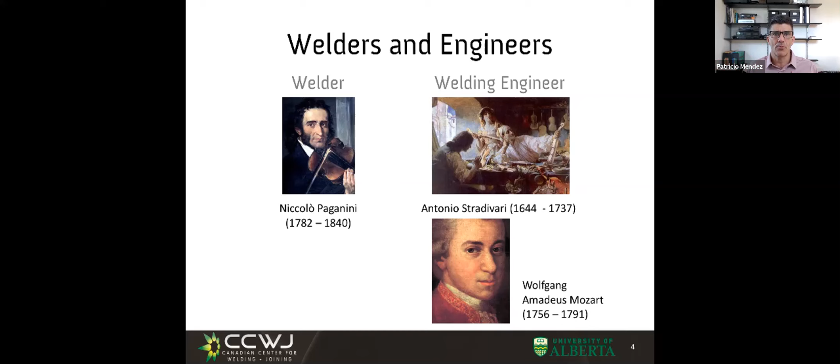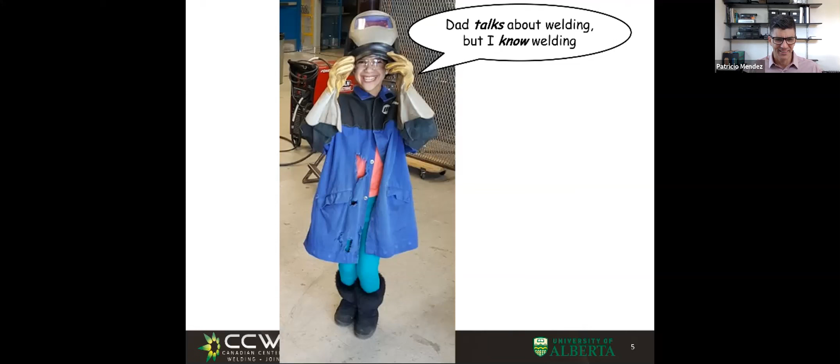Now, I say all this to some extent as an excuse for my poor welding. This little girl you see here smiling, that's my daughter. Two years ago, she had a day of welding training at St. Joe's, and she loved it. I haven't had that training, so she laughs at me because she says I talk about welding, but she actually knows welding. And yeah, it's true. But when it comes to explaining the bad welds, yes, I can explain those. And other things. So let's move on.

Welding is like an unsung hero. People don't realize welding until things happen. Let's talk about when bad things happen.

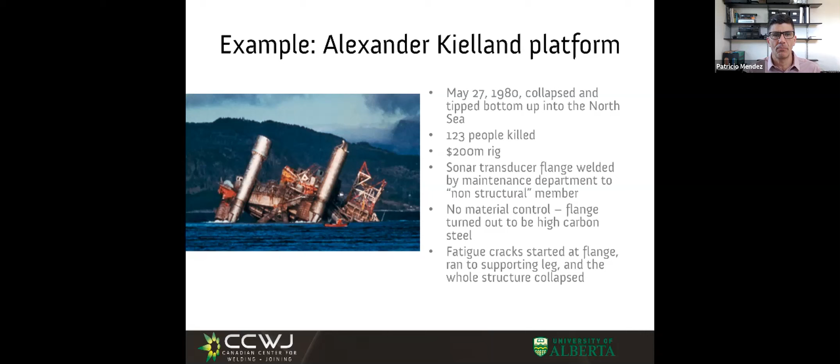Here you have an offshore platform that collapsed and killed 123 people, $200 million in damage. What happened for this platform to collapse? Well, these things measure depth using a sonar, and they wanted to put this sonar underwater, so they said, okay, let's weld it to a non-structural member. Here you have the legs of the platform, these five legs, and you see this crossbar. This was in theory non-structural, and they put this sonar, this hydrophone, here.

Now there is a problem. As you're going to see and learn in exquisite detail, not everything is welded the same way or with the same materials. In this case, when they welded steel that looked just as shiny as any other steel, the steel became too hard and too brittle, and eventually it cracked. Just for putting a hydrophone. So this non-load bearing member, when it cracked, this leg essentially became a pivot point, and the leg opened up, and the whole platform tilted and collapsed. Just because they put a stupid hydrophone in a non-load-bearing member.

Welding matters. If you don't know welding, bad things can happen. And the person who put this here, maybe they thought they knew welding because they could lay down the bead. But in the end, something went very, very wrong.

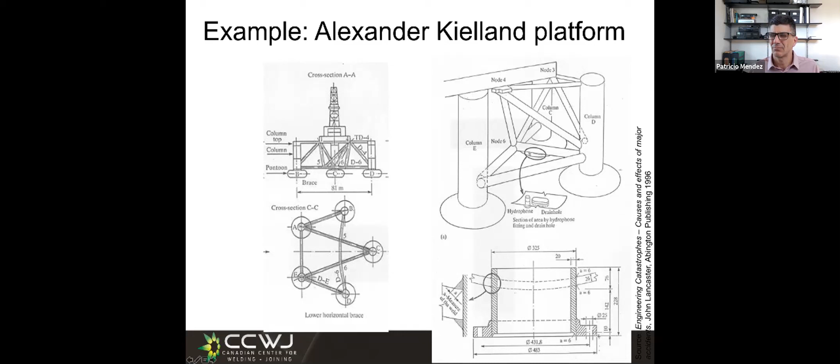But welding wasn't really well understood, and many aspects of metallurgy were not well understood. And what you don't know can actually hurt you, pretty bad. These ships were cracking, not because of the weld itself, but the cracks were associated with the welds and pretty poor steel. So if you don't know welding, you can die on an offshore platform, you can die in a ship sinking. I read that more of these ships sunk because of structural failure than because of torpedoes. That's a pretty sad thing to say, right?

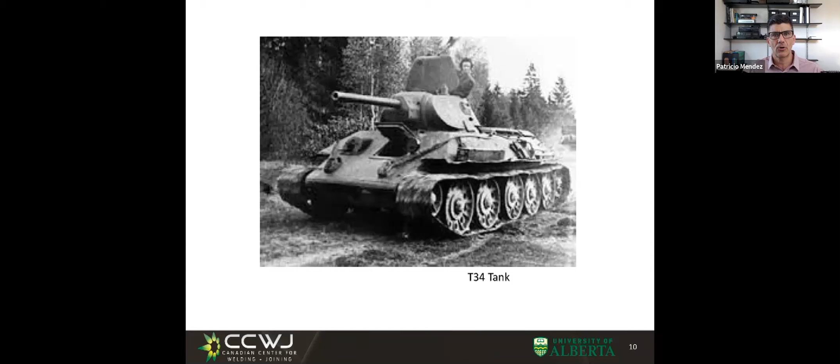The Airbus 380, which has two floors, could only be made so big because it's welded instead of riveted. And because it's welded instead of riveted, it can be a lot lighter. Funny enough, the people who developed this laser welding for the Airbus 380 were former Soviet engineers from the Paton Welding Institute - the one that developed the welding for the T-34 tank. But after the Berlin Wall fell, many of the top scientists were unemployed or very underemployed, and they went to France and did this amazing thing.

Isn't that crazy? Now, when the F-22 and the F-35 were developed, they started to weld airplanes. Typically, planes were riveted. When you weld fighter planes, you use electron beam welding, because typically you make them out of titanium, and titanium is very sensitive to oxygen, so you weld them in vacuum.

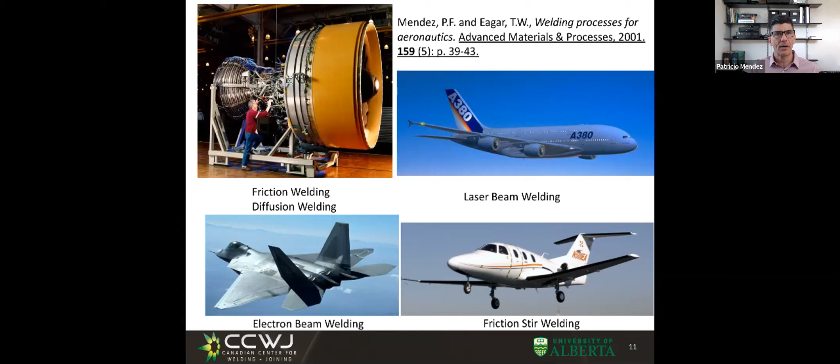Welding enables technologies that are so complex and so radical and so influential. Rockets, you like rockets? I like rockets. And so let me tell you some stories about rockets.

The Saturn V, the rocket that was developed to put people on the moon by the end of the decade of the 60s, almost failed. There were two problems that took them until the last minute to fix. One of those two problems was that they couldn't weld the second stage. Isn't that amazing? We all almost missed the race to the moon because of welding.

There are articles, and I have uploaded in a supplemental material in the lecture of today, some papers of the time, and a paper that I wrote describing some of these stories.

External tank of the space shuttle, very interesting. It's aluminum and used to be welded, until somebody thought, hey, if I mix aluminum with lithium, lithium is number 3 in the periodic table, it's so light, right? If I mix aluminum with lithium, my aluminum is lighter. And all the weight I save in this tank, I can use it as payload. How smart? Except you cannot weld it then.

The first attempt, the first way of welding it, was using a plasma process developed in Canada. And then they switched to a solid state process, friction stir welding, which I mentioned about the commercial jet plane, the small jet plane.

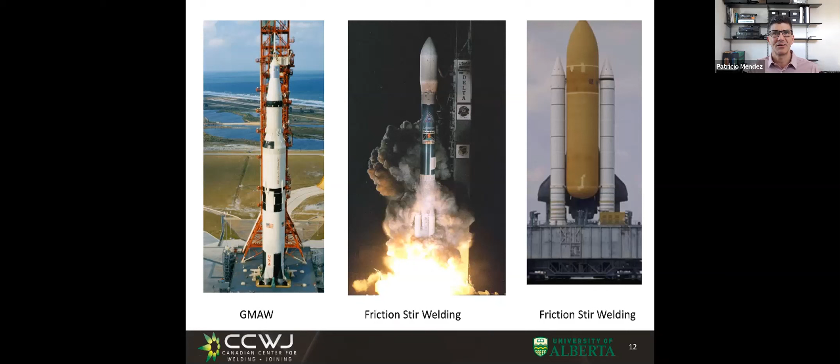Welding matters. Cars. One of the key obstacles in making cars efficiently is welding them. Now that I mentioned Elon Musk, you know that the Model S and the Model X of Tesla are made of aluminum, and they're essentially made by hand. But the Model 3 is made out of steel, and is meant to be done in the same way you make a Volkswagen car. Super automatic, super high production.

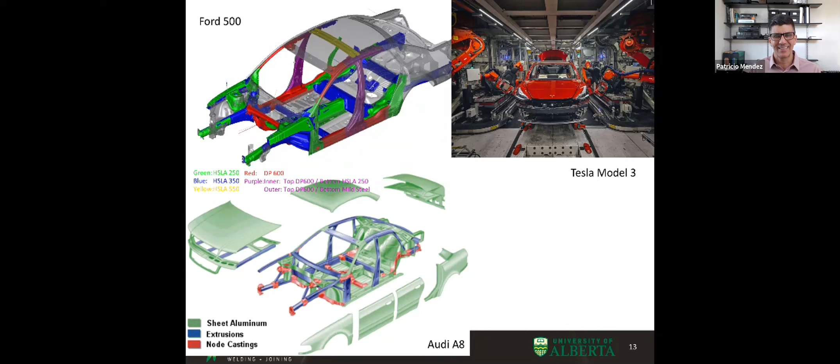Okay, people have been making steel cars since forever, but Tesla wasn't. When they started to make the Model 3, it wasn't welding well. It was a terrible nightmare. And one reason why the Model 3 was delayed with lots of problems for Tesla is because they had welding problems. Isn't that interesting? Welding again. Everybody knows Tesla and everybody knows Elon Musk and everybody knows that the Model 3 was late. What not everybody knows is that just welding, spot welding, was a problem.

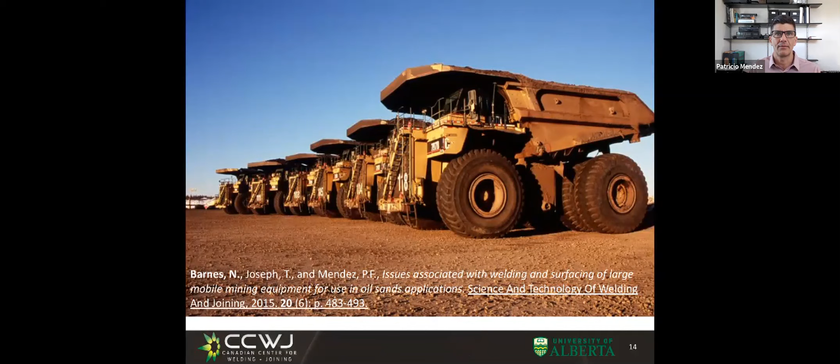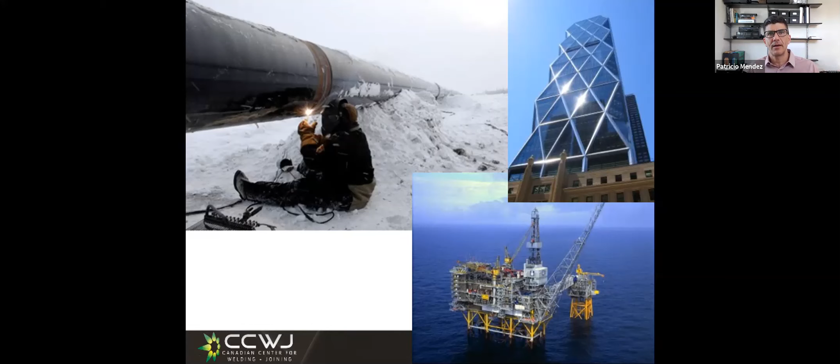If you remember when I told you I was in charge of a foundry in Colorado, we would go for field trips with the students to an art foundry. And in this art foundry, what they were making is a horse. And what I learned is that a cast sculpture in reality is a welded sculpture. Who knew? So when people make a horse, the artist makes a horse and they make the patterns and then they cut them.

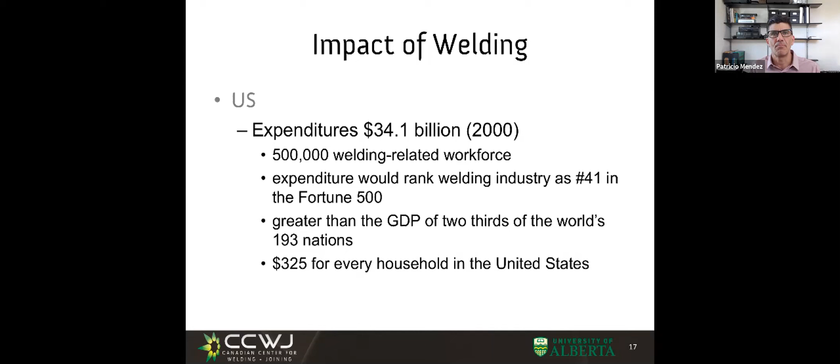And welders and engineers, welding engineers are not the same, but we're symbiotic. We cannot live without each other. Here he said something on the impact of welding, and I'm going to go quickly over that, but the impact of welding is big in money, and it's bigger in Canada than in the US. These notes you have, I uploaded in e-class.

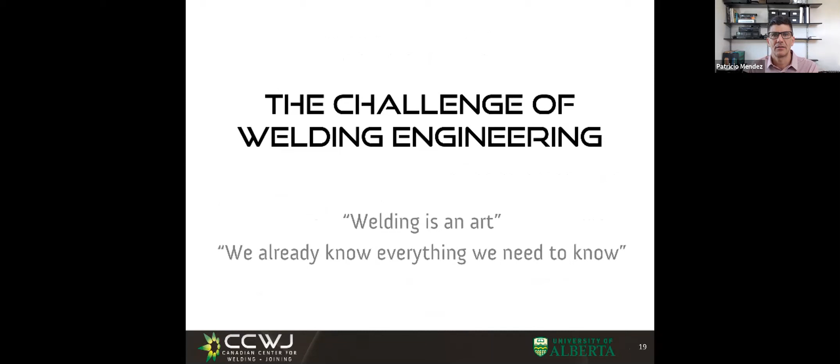So let me tell you briefly a couple of things about welding, because there's a challenge. People say welding is an art. And sure, like playing music is an art, but making violins is not an art, right? And some people say we already know everything we need to know, we've been welding bridges for the last 100 years. Why do we care about welding? Well, let me tell you.

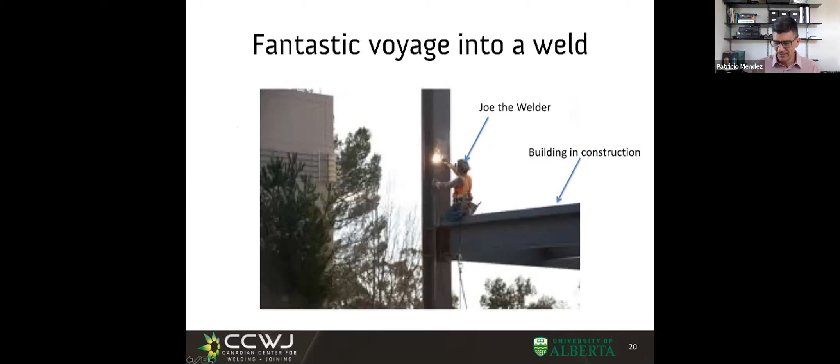Let's take a voyage into the weld. So here we have Joe the welder, or Wesley the welder here. And we all have seen this. And we get closer and we see the welder and the sparks. And if we get even closer, we see what the welder sees. We see the molten metal, that is what we call the weld pool or the weld puddle. We see this bright light that is what we call the arc. We see an electrode, and there are many types of electrodes, right?

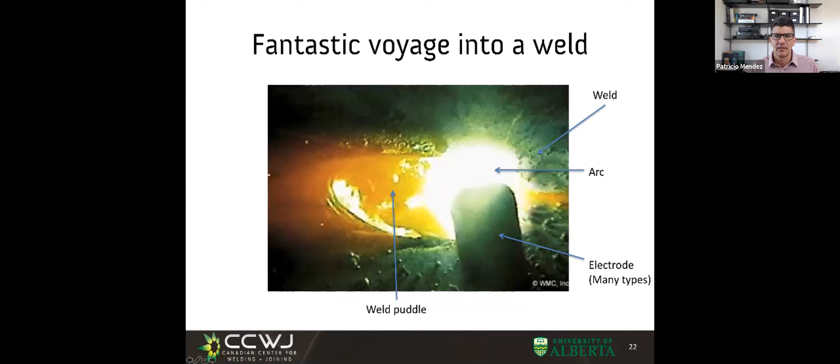But let's go deeper. So this is an image from our lab from a different welding process. But although the welding processes are very different, we see the same thing. We see an electrode, we see the bright light that is an arc, which is a plasma. We realize that the electrode doesn't touch the plate, but electricity flows. Now, there's an interesting question: we have electricity flowing through a gas. Well, you don't see that every day because you go past an electrical outlet and the electricity doesn't jump at you.

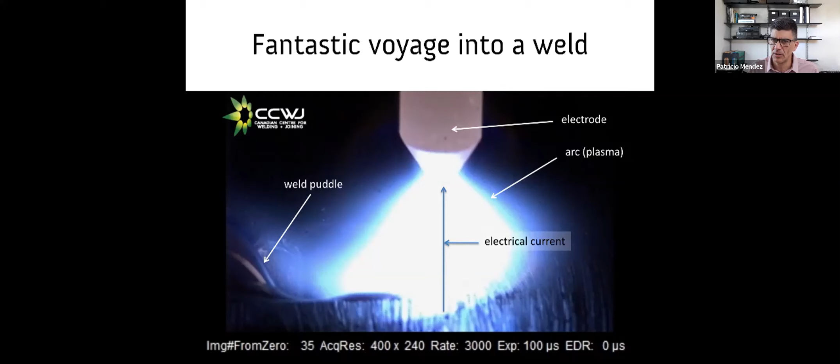So there is something special about welding in which the electricity goes through a gas. It's not supposed to. Why? How does electricity go through the gap? Well, the gap has a gas, typically argon or some gas. And what happens is that in this gas, some electrons are loose, right? And the loose electrons cause electrical conductivity, much the same way in which we have electrical conductivity in a metal. The electrons move and carry electricity.

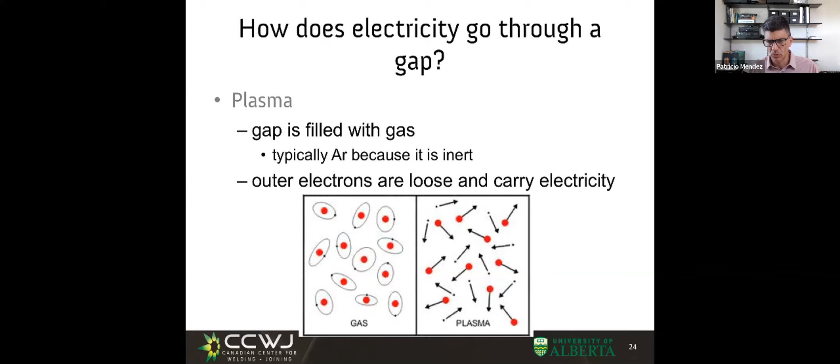But why do we have loose electrons in our arc? Well, of course, the electrons are loose because it's very hot. The electrons are attached to the atoms, more or less like apples are attached to the apple tree. And if you shake the apple tree hard enough, some apples are going to fall. And temperature is a measure of kinetic energy. So if you increase the temperature enough, you agitate, you shake the atoms so much that some electrons get loose. How hot? Well, the surface of the sun is 6,000 Kelvin, but an arc is 20,000 Kelvin.

Now it got interesting because a welder has in their hands something that is about 3 times the temperature of the surface of the sun. That's crazy, but it's true, right?

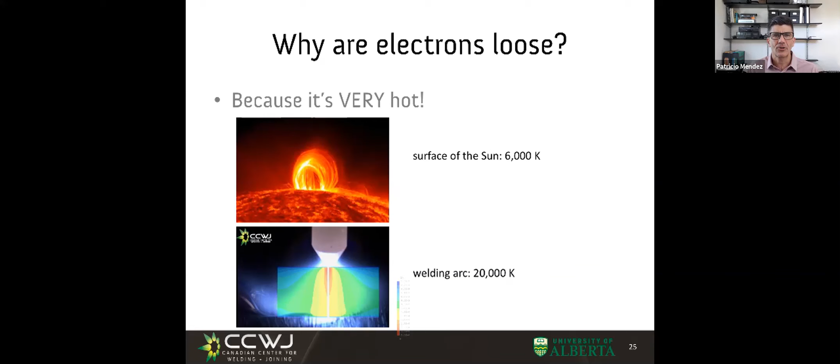So a welder has something that is hotter than the sun. Not too many places on Earth are as hot as that place when the welder is welding. That's incredible. That's how hot you need to be to shake the electrons loose?

Now why is it so hot? If we carry electricity, as the electricity goes, there is a resistance. So we have this resistive heating that creates so much heat, right? And all this comes from the equations. We're not going to be doing these equations in this class, but you start to see how the magic actually obeys things that we know, how this art actually obeys things we know.

So the electricity goes, creates this resistance, creates this heat, and the heat is dissipated to a large extent by radiation. So all this intense heat comes out as radiation with a significant ultraviolet component, and that's why we need masks, as you're going to see in the seminar next week. That's why we need the personal protection equipment, because this energy is a lot.

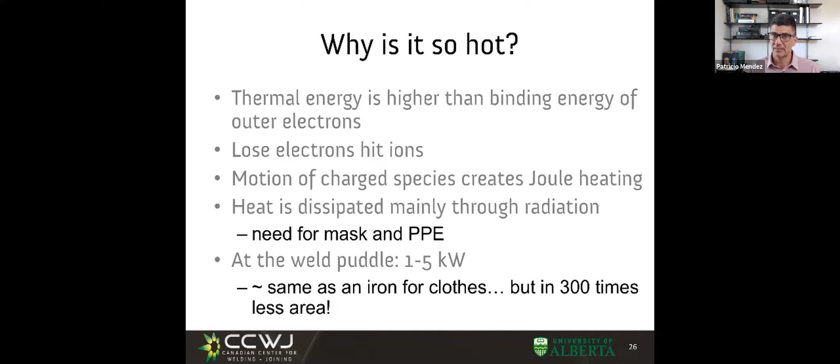If you weld even for a minute without protection, you end up with a tan that looks as if you had spent the whole day at the beach. And if you weld without protection for more than a few minutes, you get a cancer that looks like you were a worker at Chernobyl, right? This is serious stuff, and that's why welders are very well protected.

Now, not only does the electricity cause this intense heat, it also causes motion, right? And we're going to see how the electromagnetic forces work. We're not going to be writing equations, but we'll see how the electricity creates a magnetic field, and as the electricity and the magnetic field interact, they create a pressure, and the pressure creates a jet.

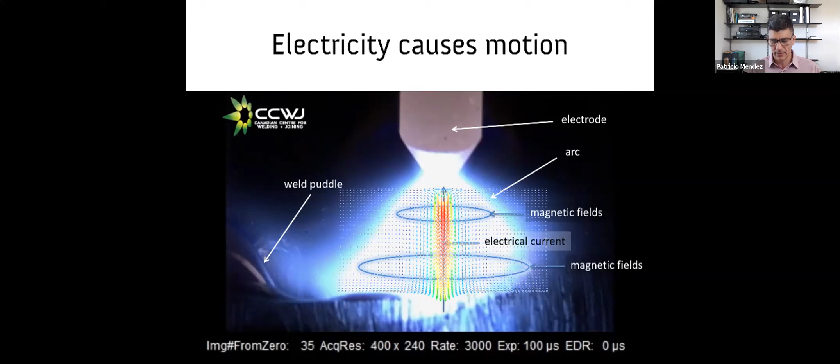And this jet has a velocity, 300 meters per second. It's a typical velocity of the plasma jet. But to give you an idea, a passenger plane is more or less 240 meters per second.

So how interesting. A welder is welding and is controlling a temperature hotter than the sun and faster than a jet plane. Now when people say we know everything we need to know about welding, no, we know nothing. It's just a coincidence that for the welding of simple things, the temperature of the sun and the velocity of a jet plane haven't created a disaster.

But when we try to weld other materials, disasters do happen, right? And we need to understand. And if we want to be more productive with steel, we need to understand things beyond the miracle that made all this combination of things work in ignorance.

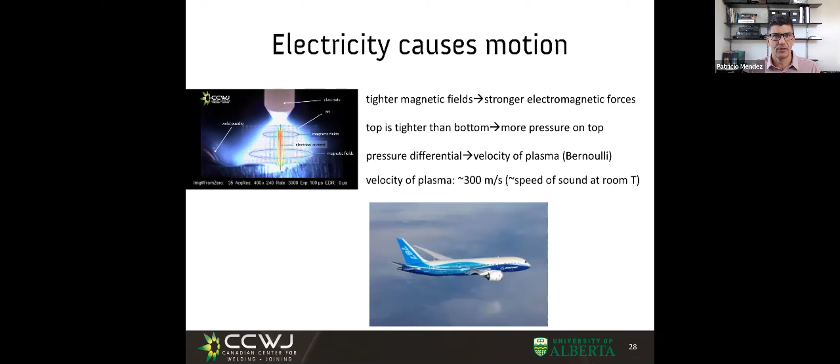To understand, and this here will be my last couple of slides, to understand this combination of electromagnetics and fluid flow that are in the arc, you need to use a field called magnetohydrodynamics, which is an awesome mouthful, right? And the guy who invented this field is Hannes Alfven, who was an engineer, and he got, developing magnetohydrodynamics, the Nobel Prize in Physics in 1970.

So he was working on the radiation, the magnetohydrodynamics of the sun. Now, we in welding are working on something that is three times hotter than the sun. I'm waiting for our Nobel Prize.

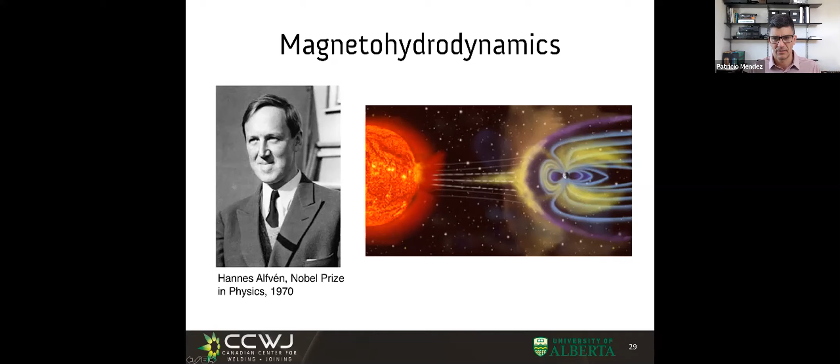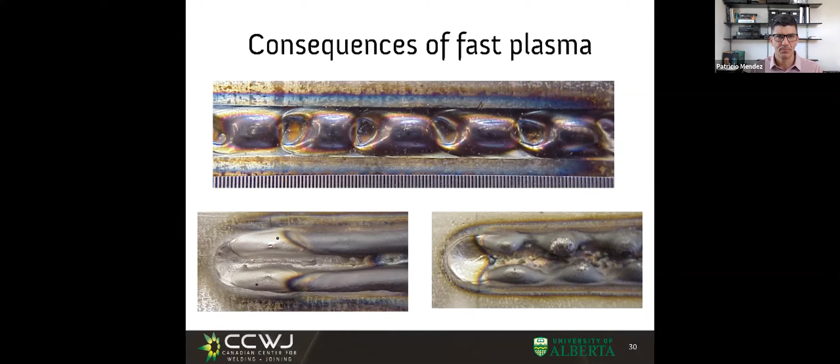I'm going to skip this, but I'm going to close on this slide for today. That welding is interdisciplinary. So whatever aspect, every one of us will feel comfortable and in love with an aspect of welding and challenged by some other aspect of welding, whether it's hands-on, or mathematical, or the physics, or the material science. There will be something that will make us happy and something that will put pressure on us.

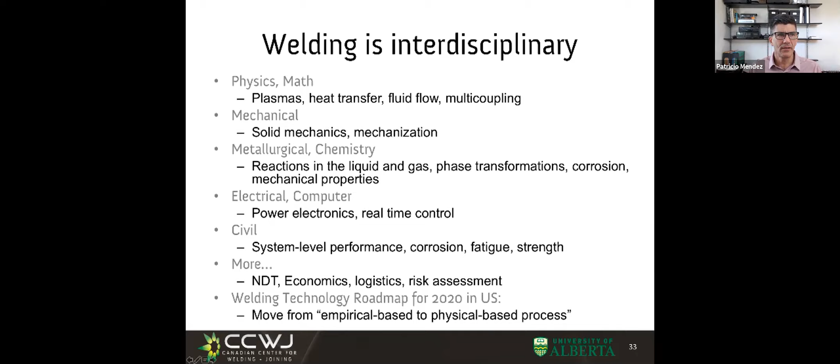And in this class, we're going to go over all of those very gently. We cannot go too deep, but you'll feel very powerful starting to have an understanding of so many of these different aspects. So I'm going to stop here for today, and thank you very much for attending this class.